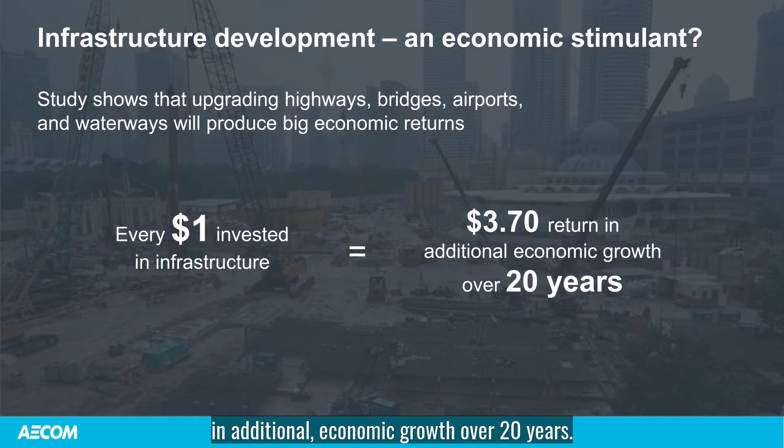Infrastructure closes social inequality, and infrastructure development has a multiplier effect of boosting and stimulating economic growth. A study by Business Roundtable, an association of CEOs leading companies in the US, found that with every single $1 of infrastructure investment, it returns roughly $3.7 in additional economic growth over 20 years.

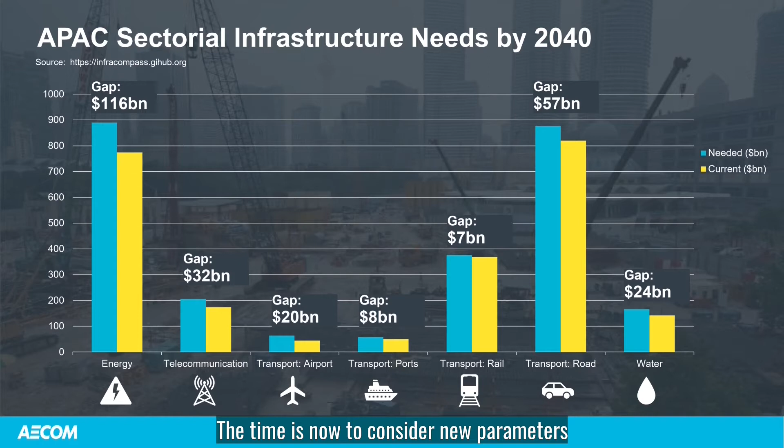But as government, commercial corporations, and people work together to realize this infrastructure development progressively, our cities continue to evolve with new emerging stresses on the systems. This includes changing urban population composition, workforce and business needs, and growing climate and pandemic threats. Cost of execution and ability to realize value of investment are also big challenges that inhibit progress. The time is now to consider new parameters and planning scenarios, particularly digital innovations in our future infrastructure planning.

As the gaps start to close with more projects being built, it is critical to look beyond the hard-built physical asset. One of the most important aspects that people have been putting tremendous effort into is how digital built assets can build alongside physical built assets to maximize the investment on the city to benefit multiple stakeholders.

To achieve this, building a digital city needs to be strategic with digital planning to drive the best outcomes. Traditionally, owners approach IT companies to procure IT infrastructure and application systems. The outcome could be successful, but sometimes, perhaps lacking industry knowledge, the products delivered may not be able to meet the owners' and users' expectations.

These days, digital asset is no longer a simple IT system supported by hardware. It is a digital replica of our physical world. It has to be outcome-driven. It has to be customer-centric. It also has to be sustainable and resilient. There's actually no difference to physical asset.

Building a digital city needs to have forward thinking, including planning, design, implementation, operation, together with industry knowledge in the long run. Taking into consideration the owner's requirement, and don't forget the most important thing, the practical usage of the digital city. In the following slides, I'm going to share with you a few real cases from different locations of the world.

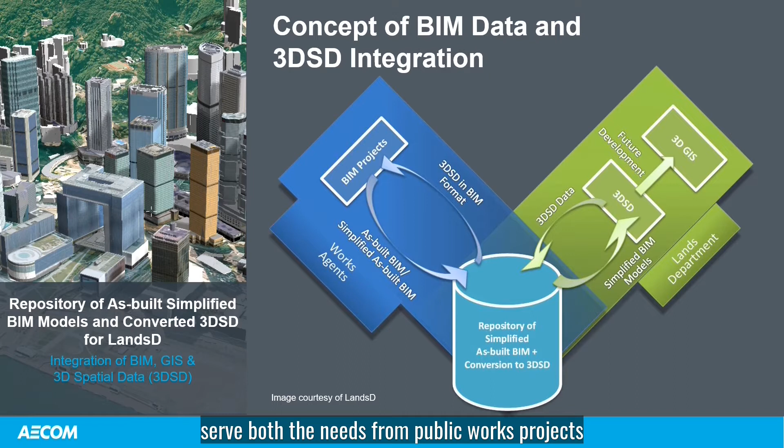Lands Department actually moved one step forward. Together with the Civil Engineering and Development Department of Hong Kong Government, they pulled in BIM models and also 3D spatial data. Aligned with the governance being set up in this BIM harmonization project, data will be converted to open format, including IFC and CityGML, which support the common spatial data infrastructure initiative of the government, and to support the building up of the 3D spatial mapping system in the future, which will be open enough for application usage and everyone's use.

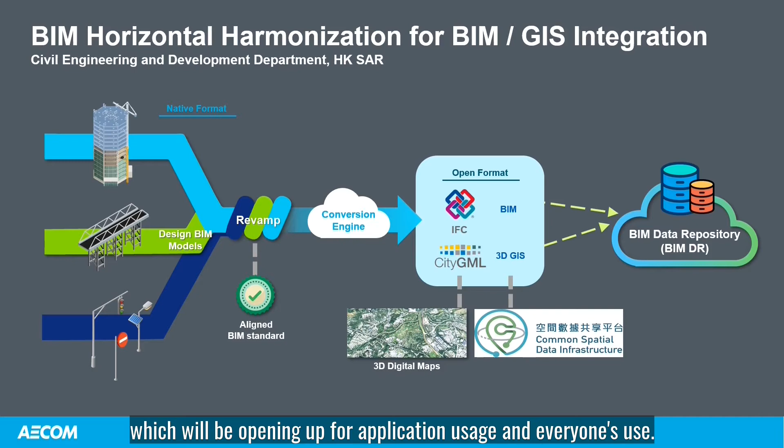The second one, zoom in a bit. We just talked about a digital city level, but now let's zoom in on big mega-size and mobile infrastructure.

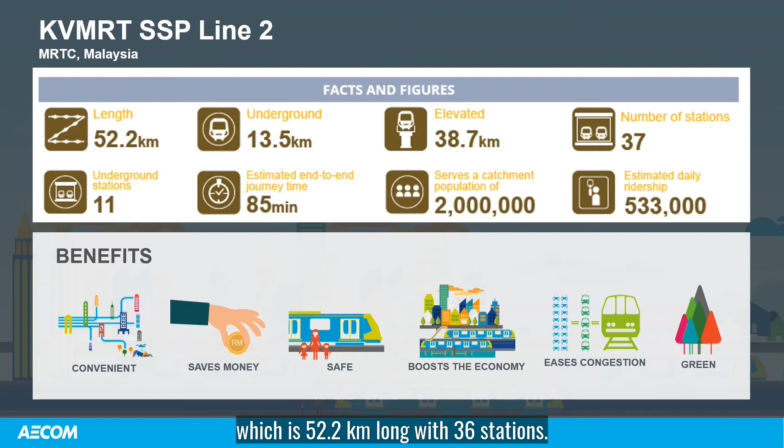It's a project in Malaysia. MRT Corporation in Malaysia, KL, plans to develop the second line. The project commenced in 2017. They developed the second line of the Klang Valley Mass Rapid Transit Railway System, which is 52.2 km long with 37 stations. Similar to all mega-sized infrastructure projects, they share the same challenges.

They have a vast amount of data, including CAD drawings, geotechnical information, different design intent, stored in different systems. And this data is not easy to store and also very difficult to retrieve.

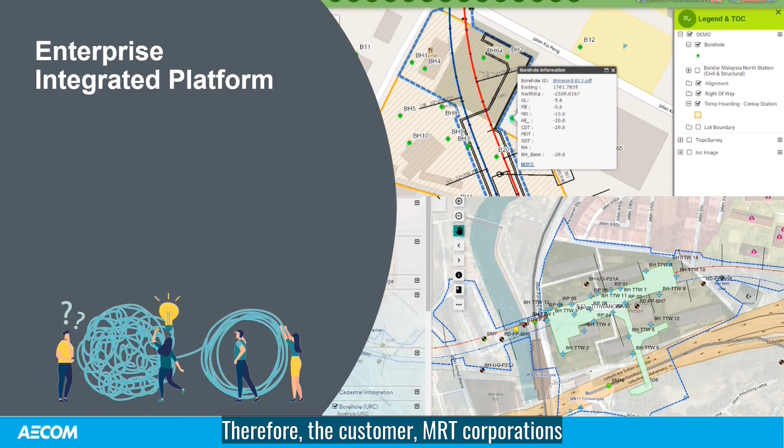Therefore the customer, the MRT corporation, decided to plan at the very beginning of the project, during the preliminary design stage, to set up an enterprise GIS platform to manage all the spatial and non-spatial data for the design and construction of the Line 2 project.

All the data, including CAD, GIS, and BIM data, are geospatially enabled and put into the same web portal. People can make use of the centralized hub to retrieve all the information for decision making. A common data environment is also set up to store all the BIM data, to retrieve all the detailed design within the BIM models.

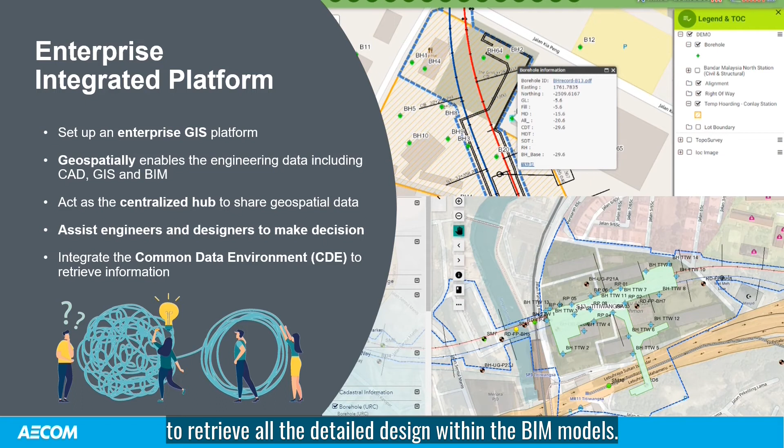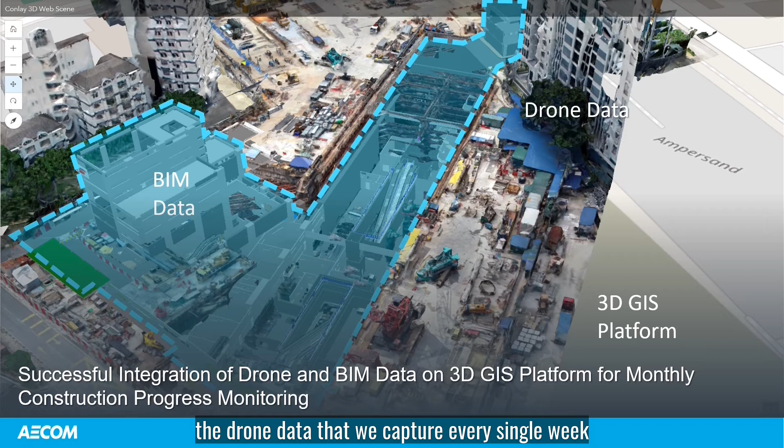It's not only about information sharing and management. The planning of the system is also for the construction stage. Together with all the information managed in the web portal, all the information on the construction site, together with the design BIM models, the drone data that we capture every single week, and also the geospatial data.

All this data is mashed up together to help the client monitor the progress of construction every single month. You can see from the screen, all this data is mashed up to show the progress of the project from time to time.

We just talked about the strategy for a mega-sized railway project. But how about existing building infrastructure? I'm going to talk about a digital twin created by the owner of a pre-war building.

URA, Urban Renewal Authority of Hong Kong, has the vision to transform a building such as an ancient building into a smart building. As you all know, design and construction stage normally lasts 5 to 10 years at most. But the O&M stage, the operation and maintenance stage, is even longer and hard to sustain. It can be up to 30 to 40 years.

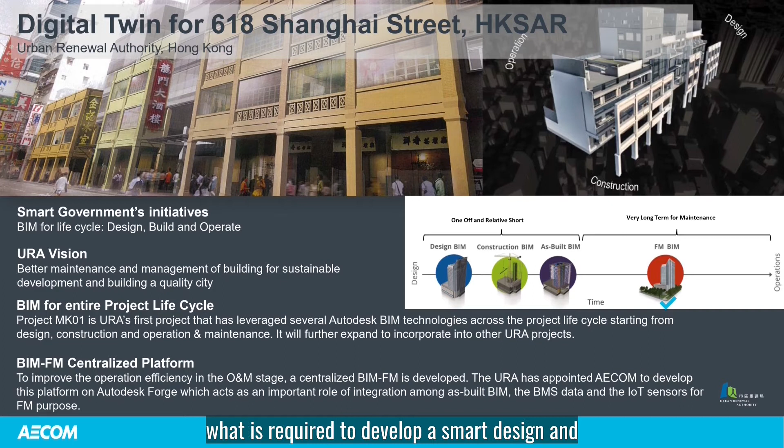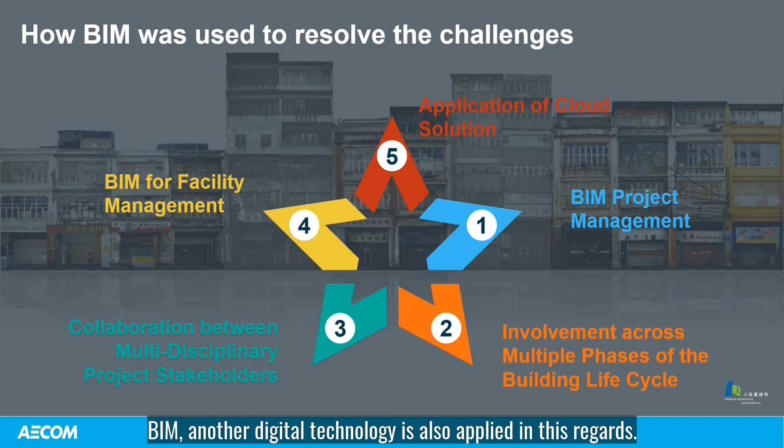Defining the digital strategy is key for us to better understand what is required to develop a smart design and maintain the building with optimal efficiency. URA applies digital technology across the entire project life cycle, not only for project management but also design and construction. But one of the most important parts is facility management, the operation stage. BIM and other digital technology is also applied in this regard.

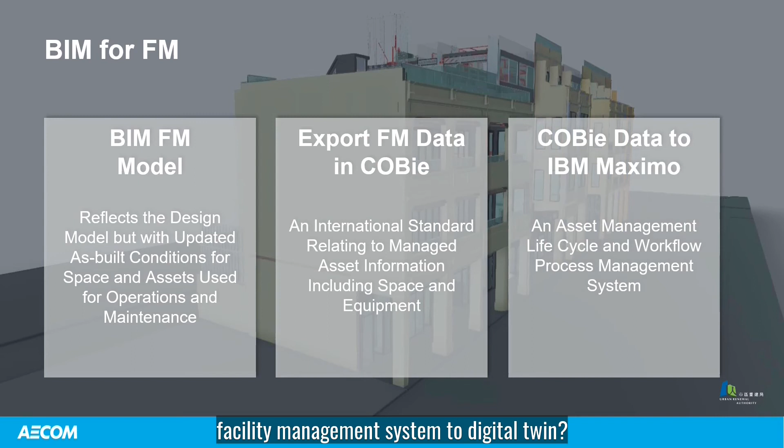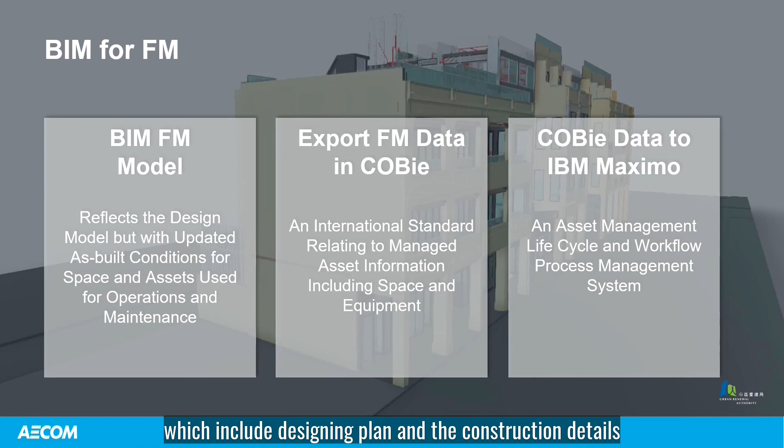But is it that easy to create a BIM-enabled facility management system, the digital twin? No. At the very beginning of the project, we worked aligned with the owner to create governance and standards for the designer and contractor to create the BIM model alongside all the necessary information, including design intent and construction details, which will be transferred through the industry standard, COBie standard, to the facility management system, IBM Maximo in this case.

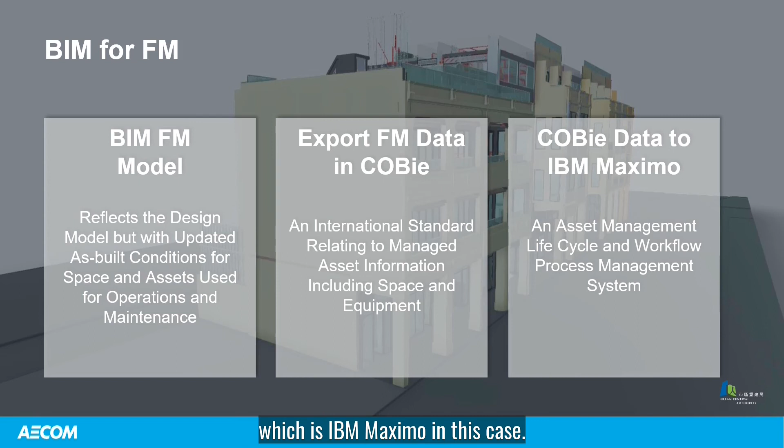The outcome, the final product of the process, is a facility management system, a digital twin of the pre-war building. The users of this system are not the owner themselves, not ourselves, but the property manager. The property manager makes use of this system day to day, managing work orders, supervising the building systems, and checking energy efficiency. Anything going wrong, they have to check and fix it.

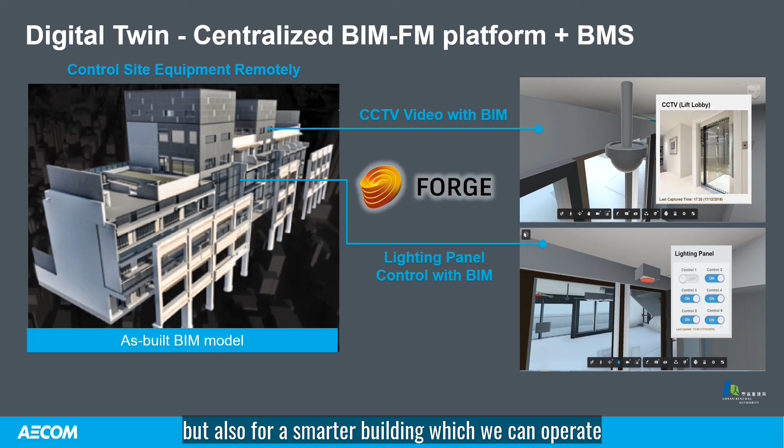So this is a system created for property management, but also for a smarter building, which we can operate and maintain in a better way. Building a digital city for efficiency, closely monitoring a mega-sized railway project, and operating a building in a smarter way are of course important. However, how to balance infrastructure development and uplifting ESG standards is equally important for a city, and a digital city covering environmental perspective is crucial.

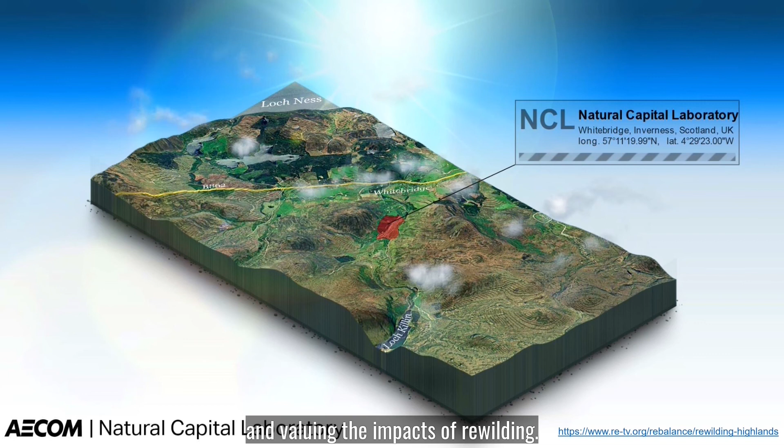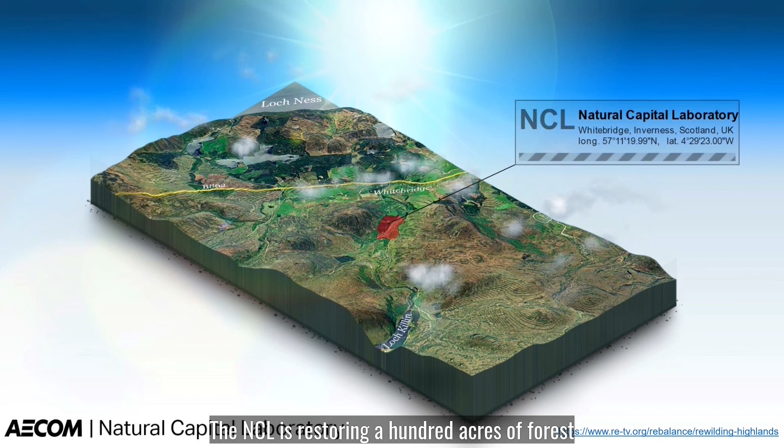Accounting for environmental, social, and economic impacts is an increasing priority for many organizations, and understanding and measuring natural capital is key. The Natural Capital Laboratory, set up in 2019, is a unique project to do just this: a live environment for identifying, quantifying, and valuing the impacts of rewilding. Located in the Scottish Highlands for the next 5 years—actually 4 years now since they started last year—the NCL is restoring 100 acres of forest and reintroducing lost species.

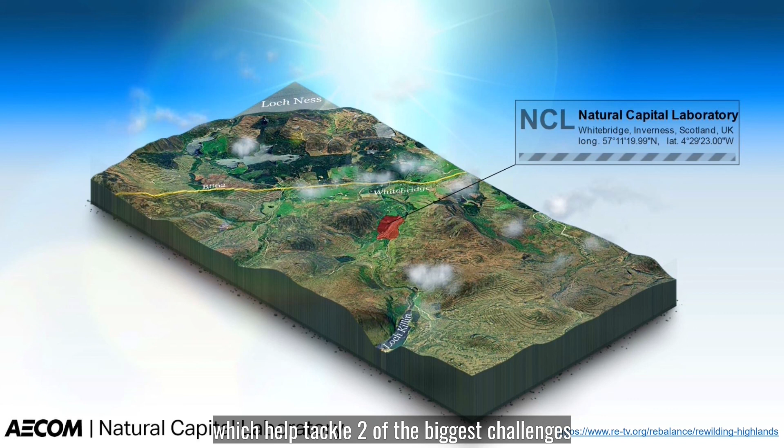New digital tools and techniques, together with a digital twin for the natural environment, have been adopted to track and communicate complex data at scale, showcase the changes on the site, and create solutions which help tackle two of the biggest challenges of our times: climate change and biodiversity loss.

Ladies and gentlemen, and all the geospatial fellows attending virtually, we all see people talking about digital twins. But why don't we take a broader mindset when dealing with our future infrastructure and city? So digital cities, the twin of our physical world, are a powerful tool to create value while tackling global challenges.

But how are we going to build up a digital city? To this end, our Asia Digital team will release a series of papers collecting best practices and lessons learned. The first paper will feature the strategy for creating a digital city from around the world. Please stay tuned for the launch date in April 2021. Thank you.